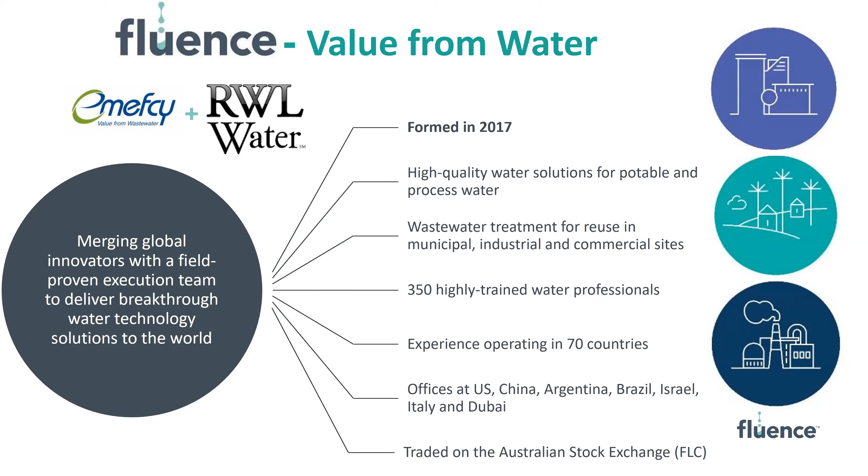Emefcy, which had the proprietary technology of the MABR. We are 350 highly trained water and wastewater professionals spread worldwide. We have experience in over 70 countries, with offices in the US, China, Argentina, and more, which I will show in a minute. We are a publicly traded company, traded on the Australian Stock Exchange under the ticker FLC.

Our global presence, as you can see, spans anywhere from China, Australia, Europe, Israel, Africa, or the Middle East, and of course the Americas — South America, Central America. We're headquartered in White Plains, New York, so essentially an American-based company.

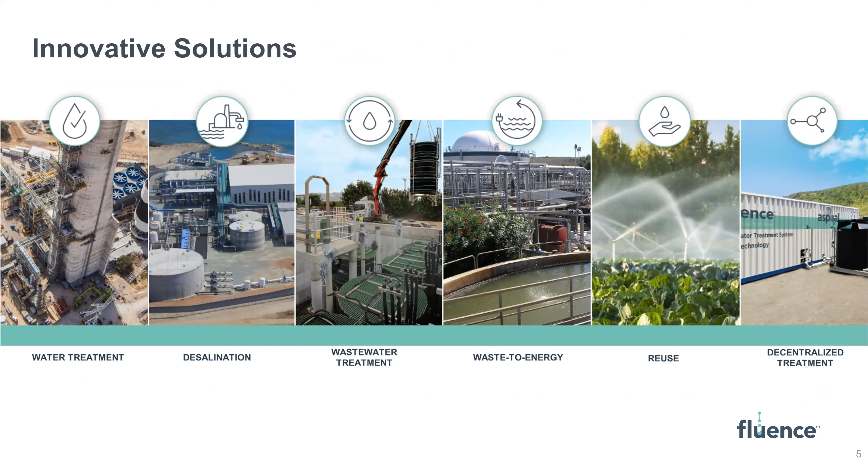We're involved anywhere in the water spectrum, from ultra pure water all the way to ultra black water treatment. So if it has anything to do with water, we've probably dealt with it and had experience with it. And with over 7,000 installations in over 70 countries, we feel quite confident to cater to any type of client, from large to small, where Fluence mainly focuses on the smaller to medium sized applications when it comes to MABR technologies.

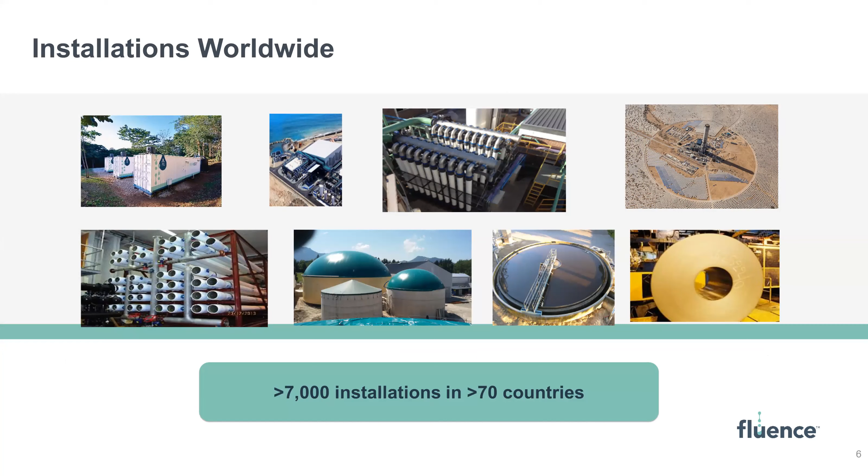So a little bit about the MABR. By the way, I forgot to mention — everyone, we encourage you to use the Q&A button at the top of your screens to ask any questions. Later in the webinar, we'll address those questions. So please feel free to write any question and we'll try to answer all of them as time permits.

As I mentioned, a little bit about the MABR technology. MABR is an acronym for Membrane Aerated Biofilm Reactor. In the water spectrum, we're very innovative when it comes to technologies, but not so much with names. So you have MABR, MBBR, MBR — all sound very similar, but are essentially very different.

MABR is an acronym for Membrane Aerated Biofilm Reactor. Typically, as soon as I say the word membrane, the first thing that comes to people's minds is UF membranes or MBRs. I need to ask you to forget anything you know about MBRs or UF membranes, because the MABR is a membrane, but acts completely differently.

That's why I like to start with this slide, a process flow diagram of a conventional domestic wastewater treatment. You'll always have your biological part of the process, your pre-treatment part of the process where solids are screened out, then some sort of biological process to get rid of soluble pollutants. Then, depending where you are in the world, you may have further filtration by cloth media filters or UF membranes or other technology, and disinfection. And you'll always have your byproduct, which is sludge.

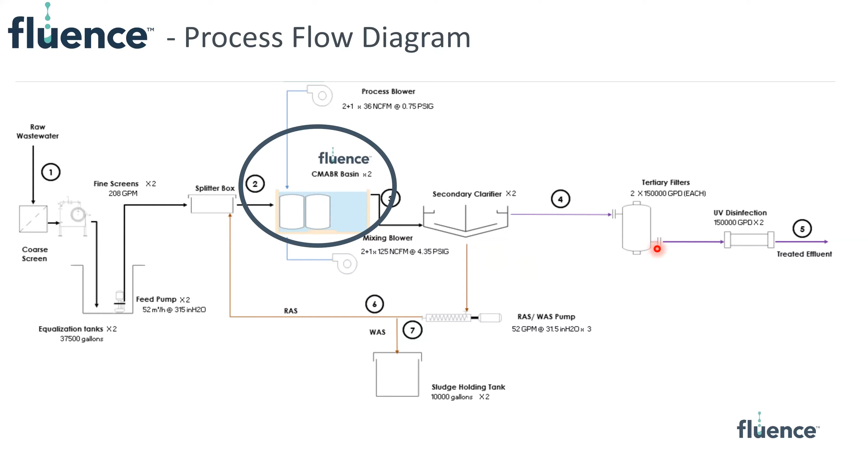With MABR, the process remains exactly the same, but we're going to focus on the biological part of the process. All of the auxiliary equipment around the biological part remains exactly the same and is designed just like in any other process. So from now on, I'm going to mainly focus on the biological part of the process when talking about the MABR — and that's why it's so different from MBR, which comes at the back end of the process, with the UF membranes. So, a little bit about aeration.

Aeration is probably one of the highest energy consumers in the biological process. This is a timeline representing the development of technologies in aeration.

It's a way to introduce air or oxygen to the wastewater. Back in the 50s and all the way up to the 70s, they used surface aerators, which would be installed on the surface of a biological basin, would spin, and any water droplet that came out to the atmospheric air would get whatever oxygen it could, then land back into the basin. A highly inefficient way to introduce oxygen to the wastewater, consuming approximately 3 kilowatt-hours for every kilogram of COD removed.

Then in the 1980s, they said, well, if we can introduce the air from the top, why not introduce it from the bottom of the basin, create a nice jacuzzi for the bugs, and make the process a lot more efficient. They came up with coarse bubble diffusers. This made the process more efficient when it came to energy, consuming approximately 2 kilowatt-hours for every kilogram of COD removed.

Then they said, well, if we can do coarse bubble diffusers, why not do fine bubble diffusers? Make the air bubble more available for the bacteria by increasing the surface area. They came up with fine bubble diffusers, which made the energy consumption more efficient, reducing it to 1.5 kilowatt-hours for every kilogram of COD removed from the wastewater. Please note that comment at the bottom, that this includes nitrification, which also consumes oxygen beyond BOD/COD removal.

So how were we able to make this energy efficient, introducing oxygen to the wastewater so efficiently when it came to energy?

Basically, we came up with this semi-permeable membrane sheet that allows oxygen to diffuse through it, but did not let water flow into it. A matter of surface tension and a coating that we put on top of the membrane to make the energy efficiency a little bit more efficient and more robust. That's the white material you see at the bottom right-hand side of the screen.

So we used that material and created a sleeve out of it, having an approximately 850 feet long sleeve by 3 feet, putting a geotechnical spacer net in between two membrane sheets and welding the circumference. So now we have like a sandwich: a membrane, a spacer, and then another membrane, with the circumference welded. We have one inlet valve at the beginning of the sleeve and an exhaust valve at the opposite side of it.

We would pump atmospheric air into one end of the sleeve at extremely low pressure, less than 0.047 psi, letting the air travel the entire 850-foot-long sleeve until it goes out from the exhaust valve. This is not how we introduce air or oxygen into the wastewater; this is just to maintain fresh air inside the sleeve 100% of the time. For that, we're utilizing the smallest blower available, which operates 100% of the time, continuously pushing air from one side of the sleeve to the opposite side.

So now, basically, from now on when I refer to a spiral, I mean a spiral tower, excuse me, an MABR tower. It means a few of these spirals stacked together.

So now we're pushing air into one end of the sleeve, and all of these spirals are basically full of air. When we put them in a biological basin, we need to anchor them down because it's like putting balloons underneath the water. So we anchor them down into the biological basin. The air we push into the sleeve is atmospheric air, which has approximately 20% oxygen concentration inside of it.

It is submerged in a tank full of wastewater, where bacteria naturally develop and utilize whatever oxygen is available in the biological reactor, reducing the dissolved oxygen content in the basin almost to 0.

That concentration difference, between 20% oxygen concentration in the air pushed into the sleeve and almost 0% dissolved oxygen in the biological basin, is the driving force for oxygen to diffuse from the high concentration side inside the sleeve, through our semi-permeable membrane, to the low concentration side, which is the wastewater. The nice thing about diffusion is that it's a naturally occurring process that consumes no energy. That is how we are able to reduce the energy associated with aeration by over 90%.

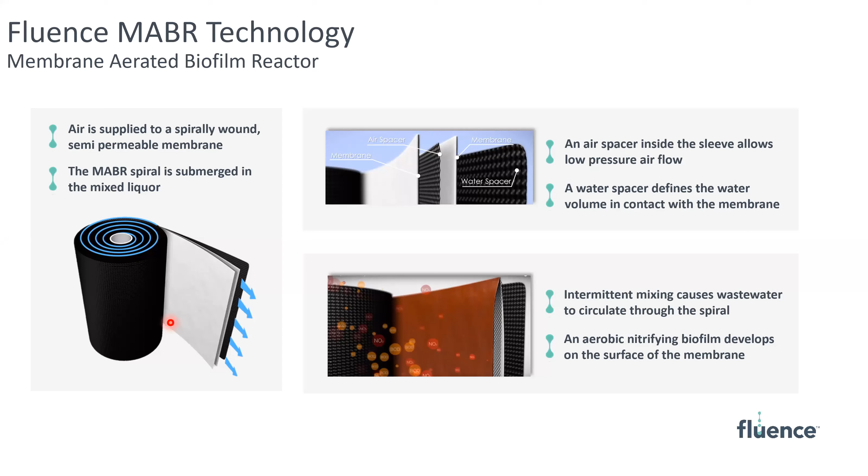When I present this in places where energy is very expensive, this is obviously one of the biggest drivers to adopt the MABR technology. But in the US, energy is not very expensive. It's a nice-to-have feature, and for very big municipal plants it's a big issue and energy reduction is important. But for smaller or decentralized plants, energy is cheap. In the US it would cost typically anywhere between 6 cents to 10 cents per kilowatt hour. So obviously it's a good driver, but it's not a huge driver in small plants across the United States.

But beyond being a very efficient diffuser, the MABR membrane acts as a wonderful platform for biofilm to develop on top of the membrane.

Basically what happens, if we were to take one of our spirals and zoom in, we would go into the sleeve. The dashed line represents our semi-permeable membrane. We all need to imagine there's another semi-permeable membrane on the opposite side, where I'm showing my mouse cursor. Air is being pushed towards your screen, into your screen, and as I explained, only oxygen is being diffused into the wastewater because of the concentration difference. I hope this makes this slide a little clearer.

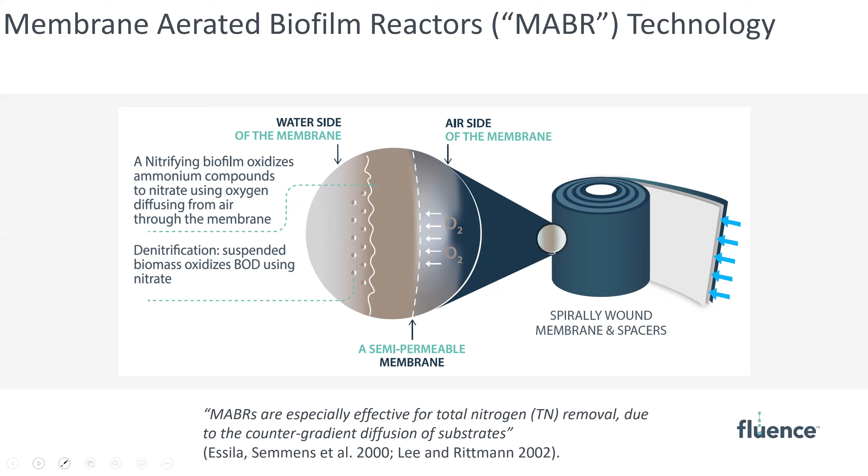I will repeat that slide shortly, because that is probably the most technical part of the presentation. So, real quick...

As you can see, we've switched it around—we're zooming in now. On the left side, air is pushed into the screen. You need to imagine there's another semi-permeable membrane sheet on the left side. Air is being pushed in, and only oxygen is diffused through the semi-permeable membrane into the wastewater. Biofilm develops on top of the membrane.

Ammonia is taken up along with oxygen, and nitrification takes place—nitrate is produced and discharged into the biological basin. With BOD available in the basin, denitrification takes place, and the nitrate is converted to nitrogen gas. So again, this is simultaneous nitrification and denitrification.

Now, all of this takes place naturally. In other words, no matter how enthusiastic the operator is and how much they want to intervene, there's not much they can do.

This is all designed by Fluence, or by an engineer. When we get the influent parameters and characteristics, such as the concentration of TKN, ammonia, and so on, and understand the effluent requirements, we design the system to include enough MABR towers in series to get rid of all the nutrients. You're then probably left with some BOD to polish off, which I'll discuss how that's done. What I'd like you to take from this part of the presentation is that the MABR is an extremely efficient diffuser for introducing oxygen into wastewater, and a champion when it comes to nutrient removal, mainly nitrogen. I'll now address phosphorus a bit.

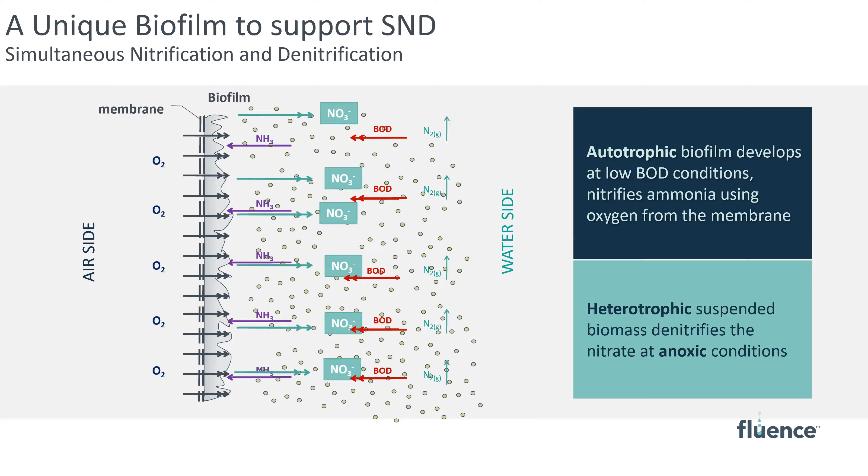We typically install a selector tank ahead of the MABR biological basin in order to allow for some anaerobic conditions for the phosphorus to be released by the bacteria and for the BOD being taken in by the bacteria, which I will demonstrate in the next few slides.

So the wastewater that flows into the MABR-based basin comes from a selector tank with about 15 minutes retention time. It'll go through 3-stage MABR towers in this example to get rid of all of the nitrogen, and it will follow these empty tanks, which will be accommodated by your typical fine bubble diffusers for some BOD polishing, because we have not addressed BOD yet.

The first pollutant that is eliminated in the wastewater is nitrogen, and only then is BOD removed. For the denitrification process, we need a carbon source. Unlike conventional processes where BOD is removed first and then nitrogen, and many times they don't have sufficient carbon source to support denitrification, in this case that never happens because we're not addressing BOD first. Whatever BOD is available in the wastewater is utilized as a carbon source for denitrification, and only whatever is left after that needs to be polished off with fine bubble diffusers.

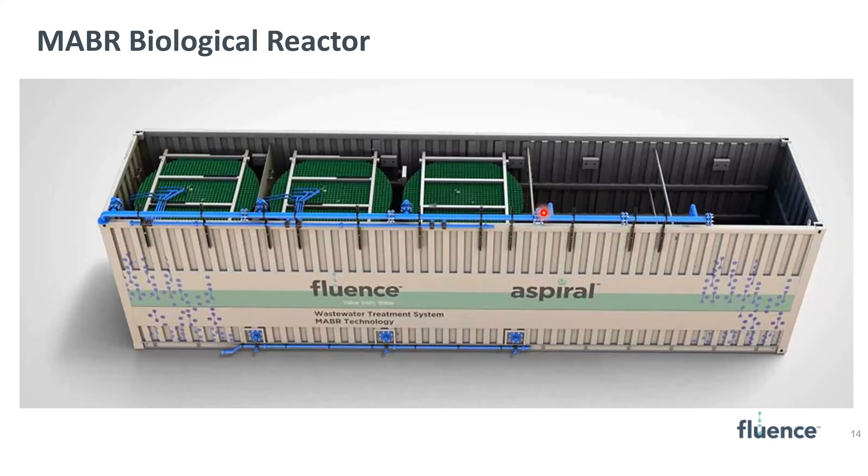This is for techno-economical reasons, because it's cheaper to put a fine bubble diffuser to remove BOD as opposed to an MABR module. So that is how we ended up designing an MABR-based process where nutrients are removed by the MABR modules, and whatever BOD you need to polish off, you do that with fine bubble diffusers.

So here are some results that better explain how we are able to remove nutrients from the wastewater. I'm using the same example I just showed. Wastewater flows from left to right.

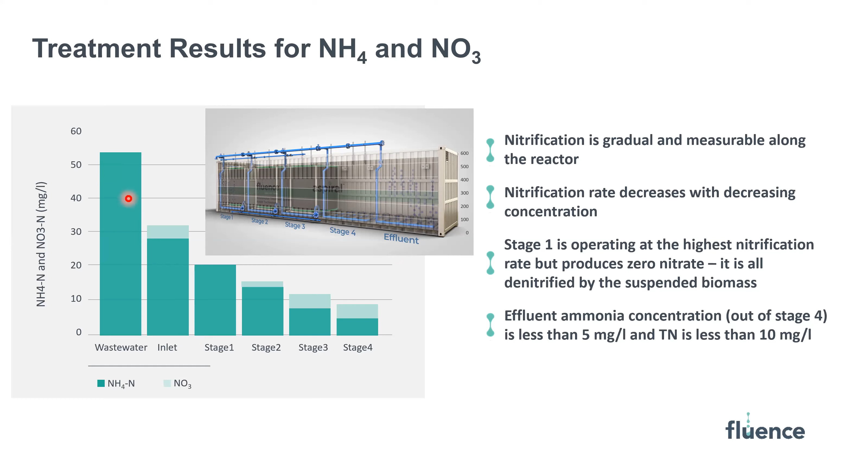Another thing we've seen: as I explained, typically you'd have a selector tank to allow biosorption to take place. You'll have a high COD content coming in the raw wastewater, and then under the anaerobic conditions in the selector tank, the bugs will take in whatever COD or BOD they could and release phosphorus. Here you can see this is before the selector tank, stage 1 is after the selector tank, and then you can see the slow reduction in COD. By the way, the reduction in COD in stages 2, 3, and 4 is associated with the denitrification, with the carbon source being utilized for denitrification.

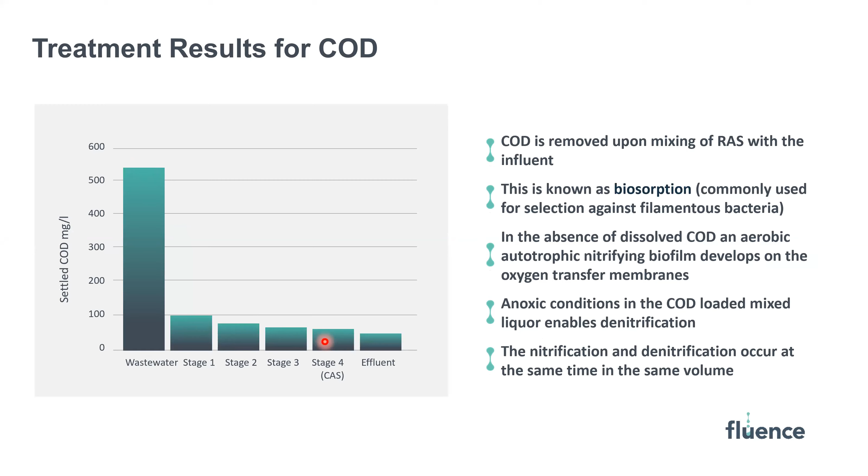And that's what happened to the phosphorus, which is the opposite of BOD or COD. You come in at about 7, and just like the bugs take in all the BOD, they release whatever phosphorus content they have in their bodies. So you have a total phosphorus spike at the beginning of the process. But the interesting thing is that the conditions around the MABR towers are sufficient to allow for a bio-phosphorus removal process to take place. At the bottom, you can see our ORP levels around the MABR modules—they get very negative, on the verge of anaerobic, which allows the PAOs to thrive in those conditions.

So you're basically getting both nitrogen and phosphorus removal biologically. What we see is between 80 to 90% bio-phosphorus removal from the process alone. So say you come in at 10 total phosphorus, you can expect to come out between 1 and 2 milligrams per liter. And if you need to polish that further, you can add some chemicals. But the point is that the process supports biological phosphorus removal as well.

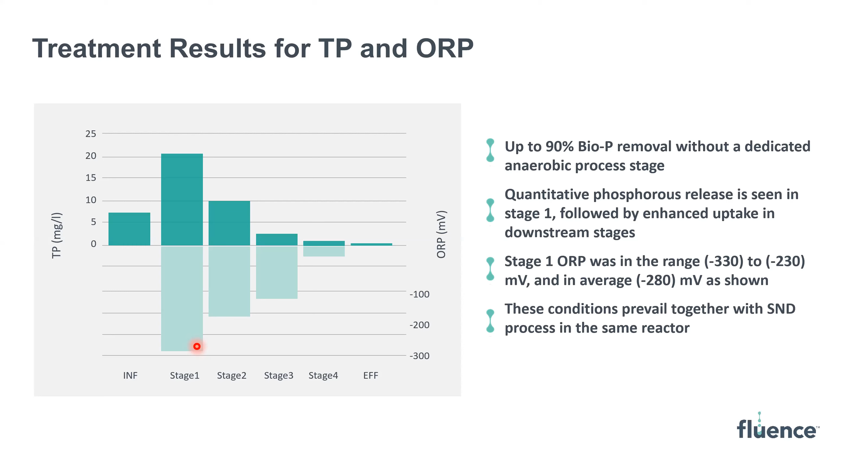And as a general note, the entire process is being controlled by the ORP levels. So once they change, the controls know how to recognize that and switch the diffusers on and off, which I will talk about in a second.

So some MABR configurations. Until now, I've presented everyone the technology, but what Fluence had done is to take this technology and convert it into products. In the center, you can see the MABR tower, which is the technology, and then we've created a few different products around it.

The main product I'll talk to you about today is our Aspiral package plant, or Aspiral product line. Basically, we've taken the MABR tower and inserted it into tanks that we manufacture, creating a whole package plant from A to Z.

Anywhere from the raw wastewater coming in, it needs to be fine screened. I saw there was a question about what screening is required. We're going through the same evolution as MBRs did in the 90s or early 2000s, where we started with 1 millimeter perforated fine screen ahead of the MABR basin. Today, we're allowing 1.5 millimeter perforated screening ahead of it, and I believe gradually over time we'll get more lenient about that requirement, but currently we're at 1.5 millimeter perforated screening ahead of it.

So it will go, the Aspiral box comprises the whole package plant, meaning the fine screening. It'll go into the biological reactor, then through a secondary clarification step or a UF membrane, which I'll discuss in a bit, and then through either a media filter and disinfection and so on. So this is your complete package plant.

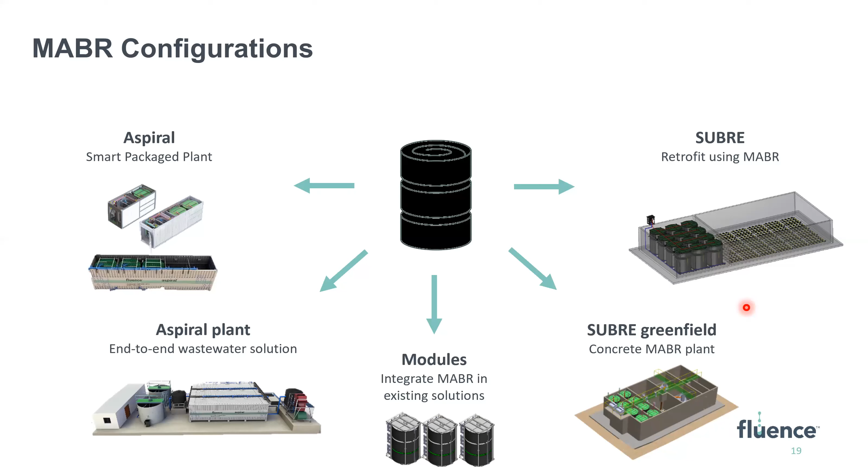So a little bit about the Aspiral product family. What we've done is basically create different Lego pieces, if you would, that when put together, give you the complete package plant. So we have different models: the Aspiral S1, S stands for small, 1 stands for how many MABR towers are in the reactor; an Aspiral M2, medium, with 2 MABR modules in the reactor; and then the Aspiral L for large, with anywhere between 1 to 5 MABR towers installed in the reactor.

Again, how many MABR towers are installed is a function of the nutrient concentrations coming in and the nutrient effluent requirement coming out.

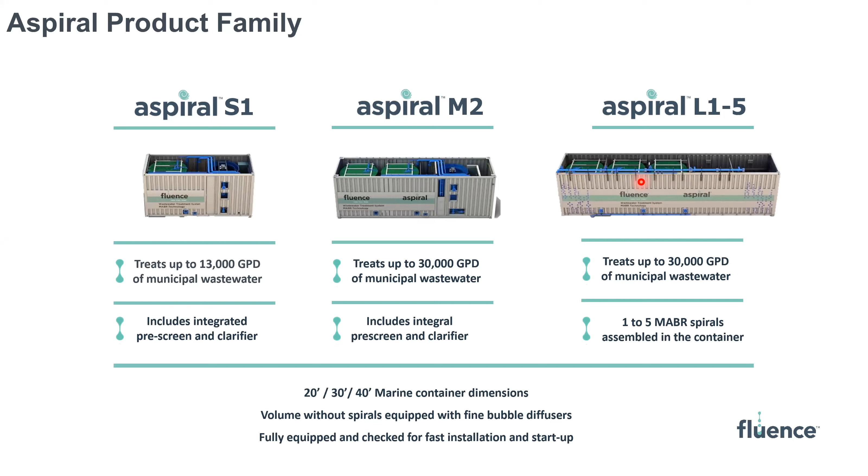Once you put these Lego pieces together, these are complete plug and play solutions. By the way, these look like cargo containers, but it's very important to mention these are not cargo containers. What Fluence is doing is manufacturing water tanks in the same dimensions as cargo containers, and then we certify these water tanks as cargo containers, which reduces our shipping cost significantly. So that's why they look like cargo containers, but these are water tanks manufactured from scratch. This is an extremely important feature to explain.

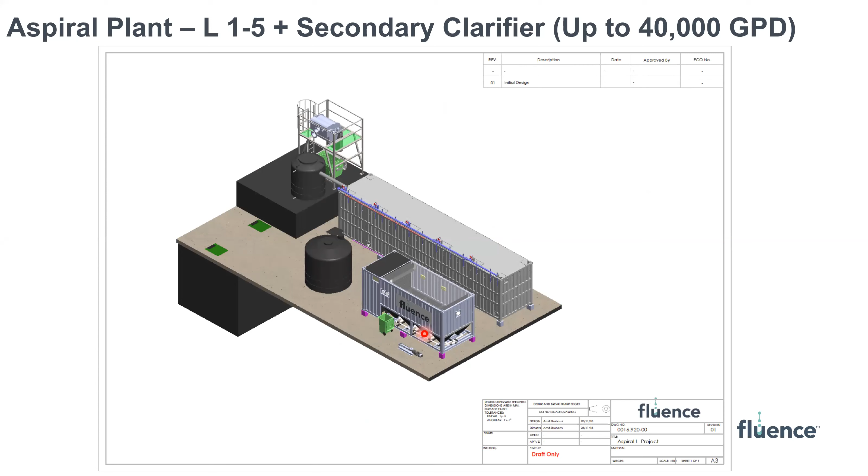In this example, what you can see is an Aspiral L box coupled with a secondary clarifier. This teaches you that the MLSS concentration in the biological reactor will be around 4,000 milligrams per liter of MLSS, plus or minus 250. But here's an interesting example where we couple our Aspiral L box with a UF membrane—so MBR plus MABR—and we'll be operating at around 10,000 milligrams per liter of MLSS at that point. So what you can understand is that the MABR towers don't really care about the concentration of mixed liquor around them; it can go anywhere from 4,000 to 10,000.

It's all a function of the drivers of the opportunity or the application. If footprint is an issue, we will probably go with MBR at the back end of the MABR. If there are extreme effluent requirements, we'll go with MBR. But if simple operation is required, we'll probably go with an Aspiral box followed by a secondary clarifier, followed by a sand filter, if you would, and disinfection. Obviously, Fluence provides all the configuration or all the solution.

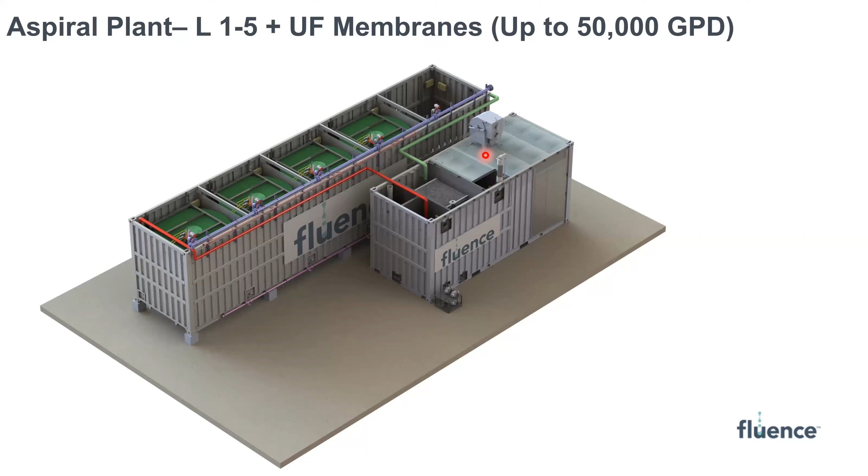So we can play with what configuration it goes. But I like to use this slide to explain that the MABR does not compete with MBR, it complements MBR. It's a feature, a component that goes into the biological process in order to enhance its capacity.

Obviously, we can expand these over time. We can phase it in. So what you see here is an Aspiral site, if you would, where you would have multiple Aspiral Ls, followed by a UF membrane and auxiliary tankage that is required. This is an extremely important feature, especially for smaller applications, because you want to invest as little as possible at the beginning, and then invest more only if more sewage flow comes into the plant. That allows you to spread your expenses, or your client's expenses, over time. So it's a complete modular solution that can be expanded over time, which is an extremely important feature.

One of the things that Aspiral does is minimize the amount of civil works required. In the United States, civil works are probably the most expensive part of any project. With an Aspiral setup, the equipment costs about 50% of the whole project cost, and the civil work supporting that costs an additional 50%. That's what we see, as opposed to a conventional municipal project where equipment is typically between 15 and 20%, and the rest is associated with engineering and civil works. So by having a plug-and-play solution, we're able to reduce the amount of civil works required, and by that, reduce the cost of a project as a turnkey.

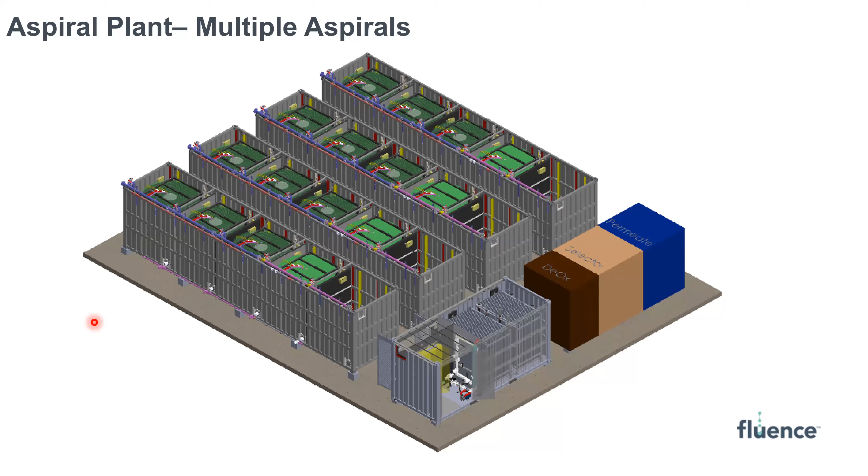Again, this is just another layout of the Aspiral site. I don't want to get into this. This is an example for a SUBRE tower. As you can see, it's a function of how deep the basin is that we want to retrofit our modules into. So it can be a 1-stack tower, 2-stack tower, 3-stack tower, 4-stack tower, and so on.

It's important to explain that at this stage, these are not drop-in, meaning that in order to retrofit an existing municipal plant, we would need to drain the basin, install the MABR reactors or towers, and fill the basin again. So we are working on a drop-in configuration, but at this stage, that's what is required.

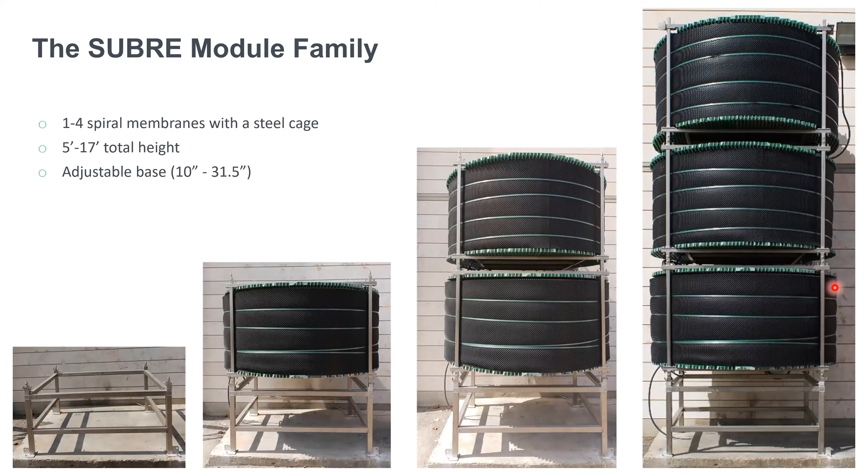This is an example of a retrofit, but Leon will talk more about that, so I'm not going to take the time to discuss this. But essentially, we can retrofit into existing facilities. As I explained, the main drivers to do that are to get better effluent quality from existing facilities, especially when it comes to nutrients, to be able to increase the flow within a given infrastructure, and to reduce the energy use of the plant.

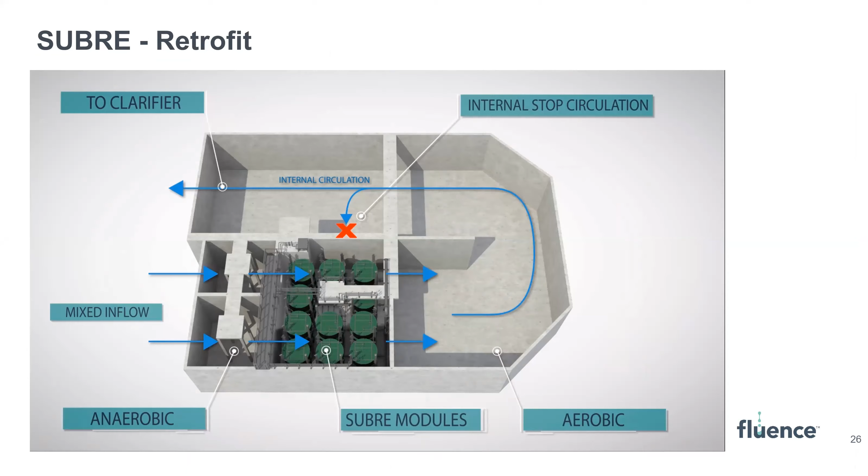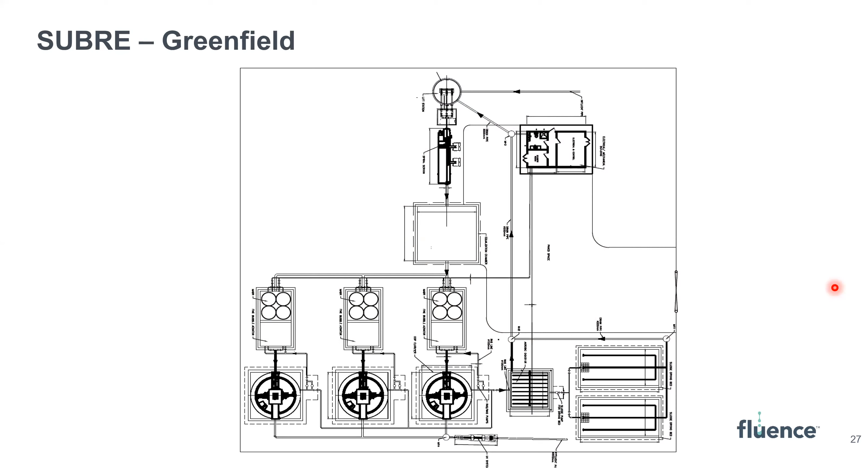Again, these are some examples. This is a project taking place in Jamaica for SUBRE Greenfield, where they're putting in 3 lines. That's the technology that was chosen.

Now for the remaining 5 minutes that I have, I'd like to take your time and go over a couple of case studies that are very interesting before I hand it over to Leon. I apologize, I've taken a little longer than I promised, Leon.

The first case study is a pilot that we put in at Stanford University in California. The facility is called the Codiga Resource Recovery Center, which is basically an initiative Stanford came up with to test and validate new wastewater treatment technologies. We were their first client. The system was put in at Stanford in the beginning of 2018. Again, it's just a pilot, so it treated only 3,000 gallons per day of extremely highly concentrated wastewater. Please note the raw wastewater characteristics: over 1,200 milligrams per liter of COD coming in, over 100 milligrams per liter of TN coming in.

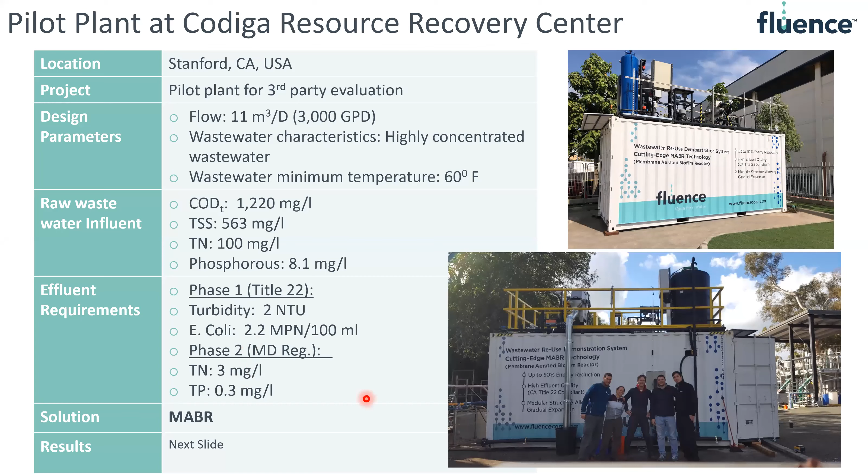We had 2 phases for the pilot, or 2 goals, I should say. One was to meet California Title 22, which mainly addresses tertiary treatment and disinfection—turbidity of less than 2 NTU and E. coli count of less than 2.2 MPN per 100 milliliters. Then we had a phase 2, or second goal, to meet Maryland's ENR requirements, enhanced nutrient removal requirements, which essentially means less than 3 milligrams per liter of total nitrogen and less than 0.3 milligrams per liter of total phosphorus.

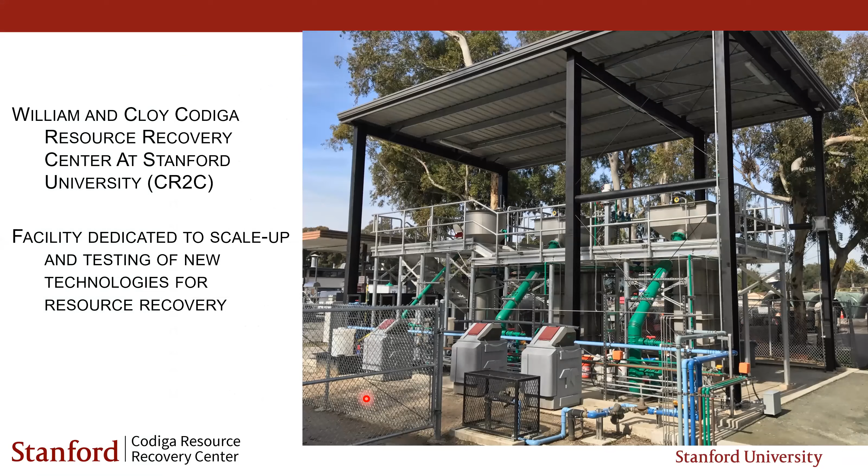So this is the facility, the Codiga Resource Recovery Center. As you can see, the slide theme has changed because these are slides generated by Stanford University.

So this is the setup. You would have the raw sewage coming from the main sewer line in the vicinity of the site. It would go through grit removal, and then you could choose what type of wastewater you would want.

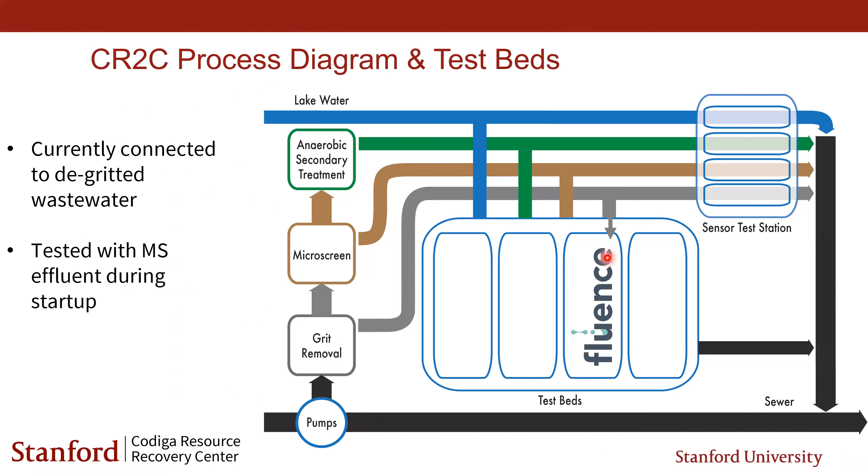In our case, we chose the raw wastewater straight after it came from the municipal line. So it would go into the Fluence pilot plant.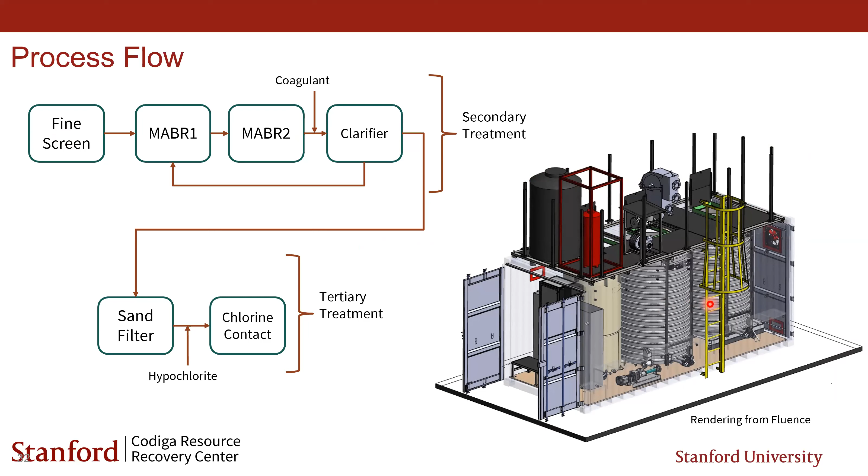This is a custom designed pilot for Stanford, so they would be able to walk into the container and test the wastewater at all the different stages of the process.

So in this case, it went through 2 MABR stages, followed by a secondary clarifier, followed by a sand filter that was put on the roof, a chlorine contact tank for chlorination, and discharge effluent.

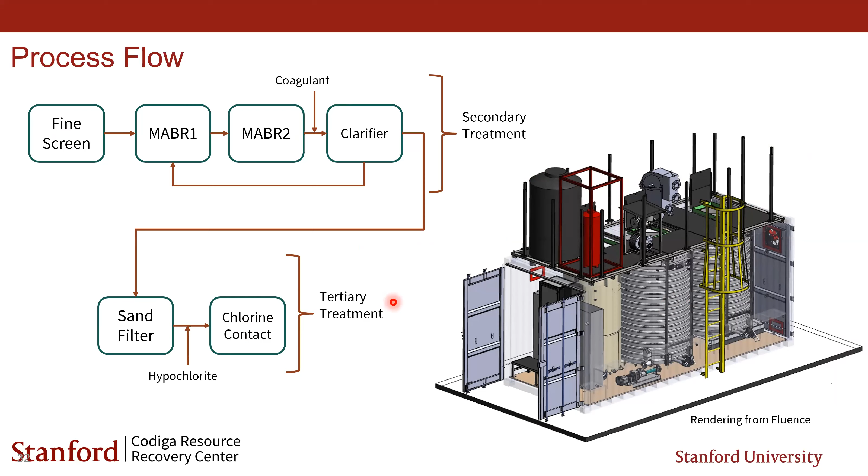The goals, as I explained, were to meet California's Title 22 reuse standards, so NTU and disinfection.

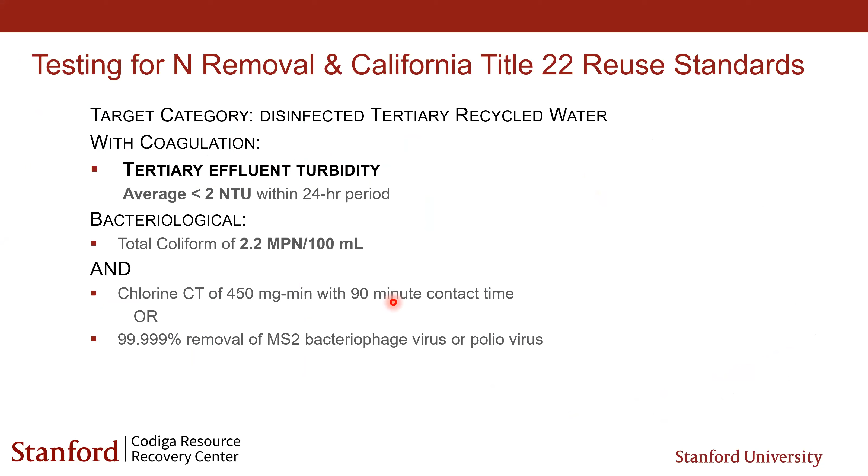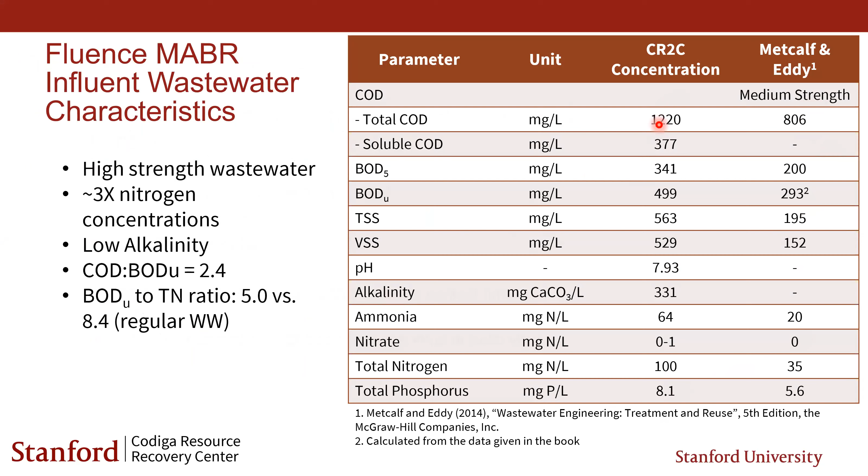We also added the TN requirements for Title 22 because Title 22 only talked about disinfection and tertiary filtration. So we added the requirement of meeting less than 10 total nitrogen.

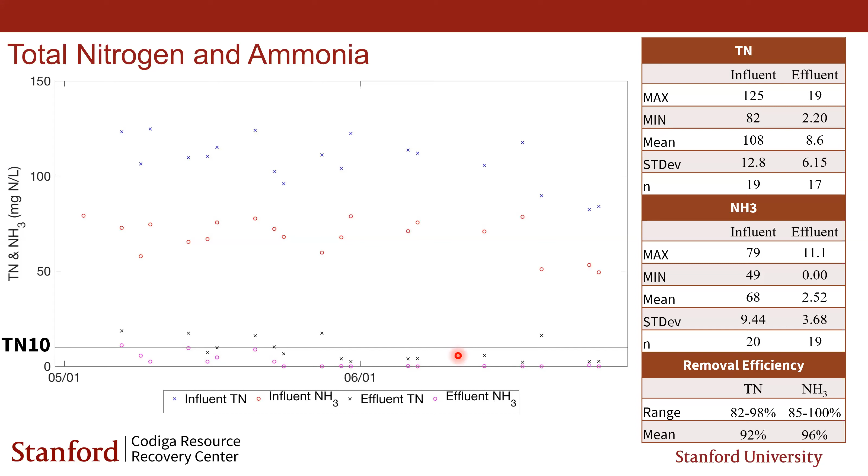Turbidity was always kept below 2 NTU. So we were successful in this.

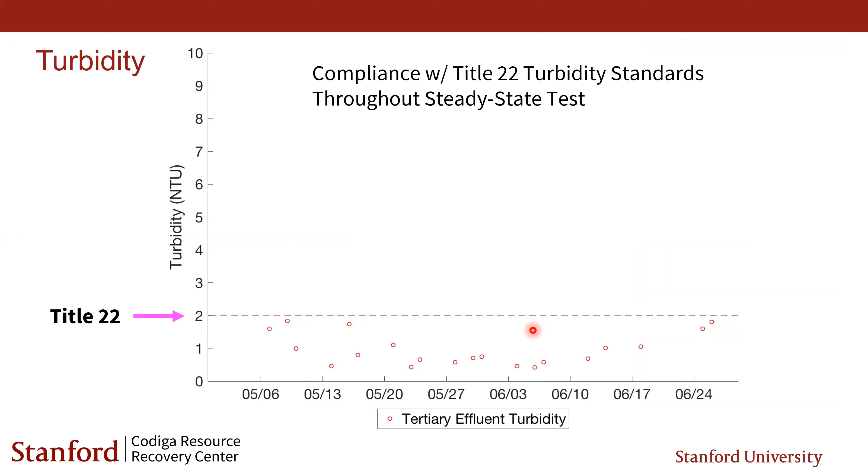In a second I will show you also the residual chlorine, which represents the disinfection capability we had, but I wanted to give some acknowledgement to the people at Stanford that supported our efforts.

Professor Craig Criddle, who basically manages the Codiga Resource Recovery Center, and Dr. Sebastien Tilmans, who manages the facility.

So these are again the turbidity and total residual chlorine results, which basically mean that we met the 2.2 MPN per 100 milliliters of total coliforms.

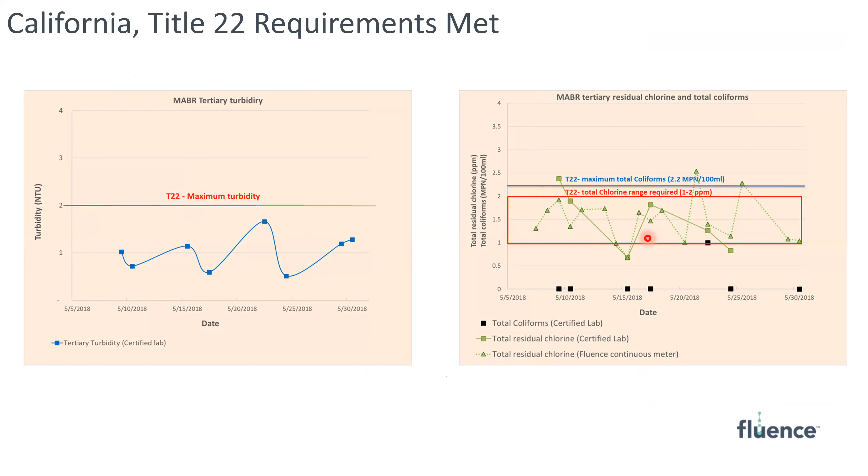And then we went on to the second stage, which needed to demonstrate that we're able to show always less than 0.3 milligrams per liter of total phosphorus in order to comply with Maryland's enhanced nutrient removal requirements.

And also total nitrogen of less than 3. Please note the concentration difference - this is bringing it from 111.5 milligrams per liter total nitrogen down to below 3.

So obviously successful in this, and we were very happy. That's part of the reason why MDE gave their blessing to our process to be implemented in the state of Maryland.

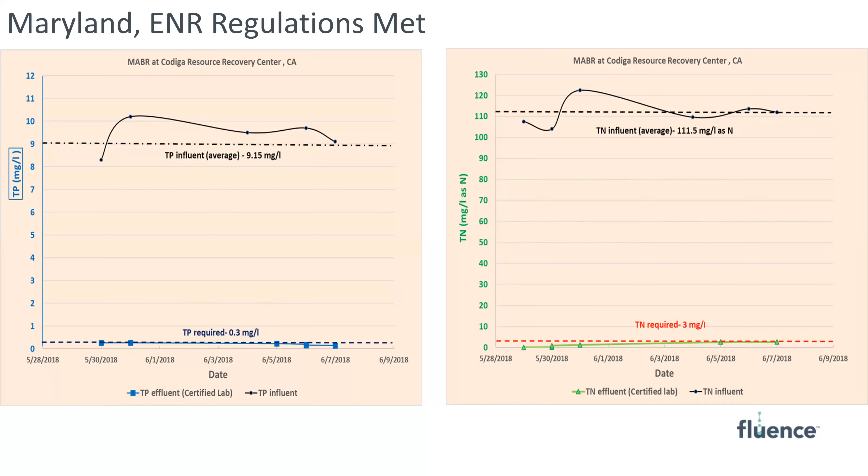Another last case study, and from there I'll hand it over to Leon. It's an RV resort in the state of Oregon, in La Pine, Oregon.

This project has been done in collaboration with Orenco, who is probably one of the biggest fiberglass manufacturers in the United States, and they also have a division that does their own packaged wastewater treatment plants.

In this application, we needed to treat the wastewater of an RV resort in Oregon with an approximate 18,000 gallons per day average daily flow with a peak of 42,000 gallons per day.

We ended up putting 4 MABR towers of 2 stacked spirals in each tower, integrated into Orenco's fiberglass tanks, which required only 1 tank.

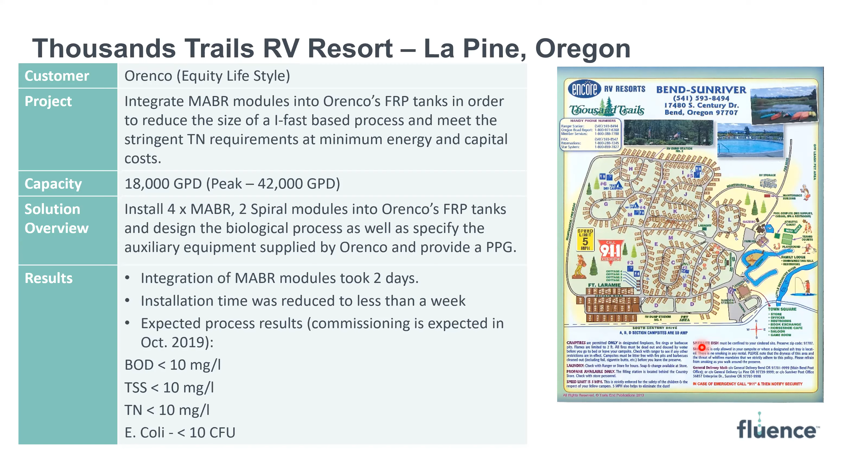Effluent requirements were less than 10 BOD, less than 10 TSS, less than 10 total nitrogen, and you can see the disinfection requirement.

Before Orenco chose us as the biological treatment technology, they evaluated 5 different other technologies.

So anyway, obviously the MABR, MBBR, simultaneous nitrification and denitrification activated sludge process, 2 different types of MBR processes, traditional activated sludge process, and Orenco's own textile packed bed filter.

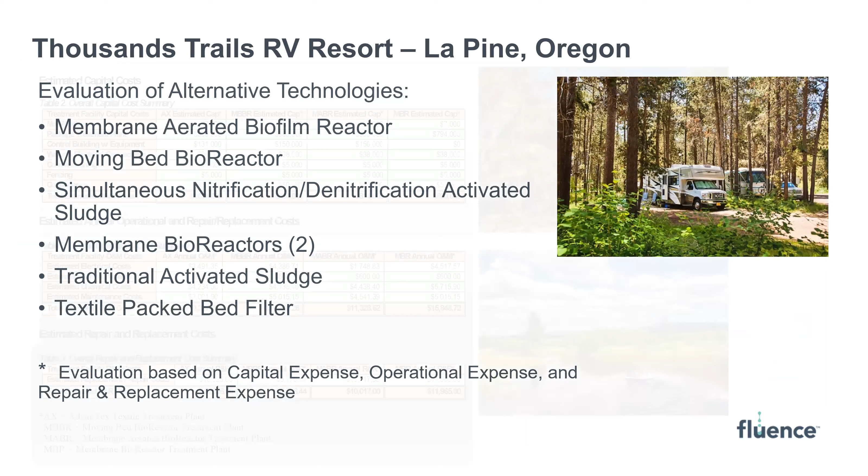So they evaluated all of these different technologies, and they've done a complete life cycle cost analysis, both on the capital cost and the operation cost summary.

So basically trying to put these together, what you can see here is that essentially the MABR, which is the 3rd column, came out cheaper both on the capital side and obviously on the operational side.

So when you combine these 2 together, you see that the MABR was the superior technology.

I did forget to mention that for Stanford, the full report is published and available for everyone at the Stanford website. But if anybody would like a copy of the report done by Stanford, please don't hesitate to reach out to us and we'll send it through.

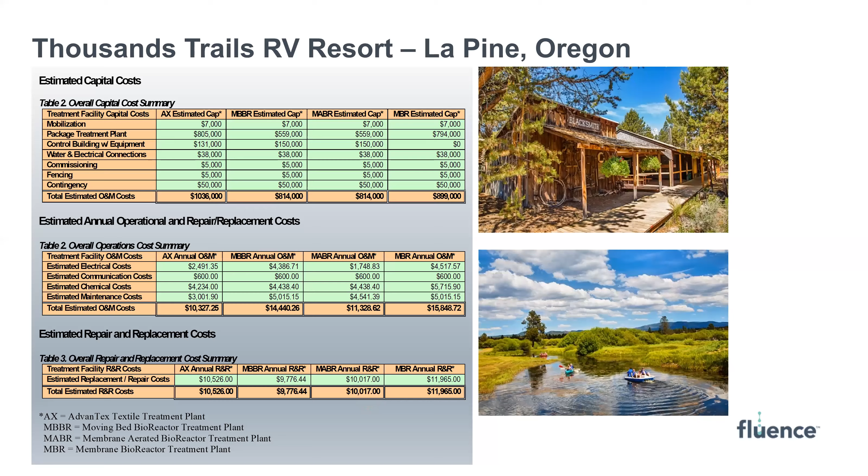And at this point, I'd like to pass the stage to Dr. Leon Downing out of Black & Veatch, who is a principal process engineer and innovation leader with Black & Veatch from Madison, Wisconsin. Leon provides technology leadership in support of Black & Veatch process engineering and applied research projects globally. A graduate of the University of Wisconsin, Platteville, Leon obtained his Master of Science and PhD at the University of Notre Dame. Dr. Downing is an active member of several professional organizations. He currently serves as the Vice Chair of the Modeling Expert Group of the Americas, has authored chapters in 4 WEF books, and contributed to 14 peer-reviewed scientific journal publications. So thank you, everybody. Leon, thank you so much for joining us and speaking in this webinar.

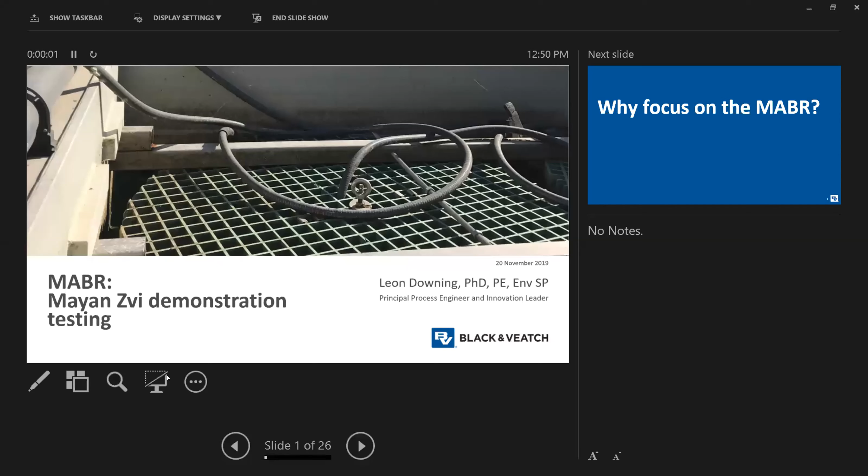Thank you, Ronen. Thanks everyone for attending this webinar today. Let me get this presentation up and running. Nope, let's see, there we go. Ronen, is that showing up? Yes it is. Perfect, thank you.

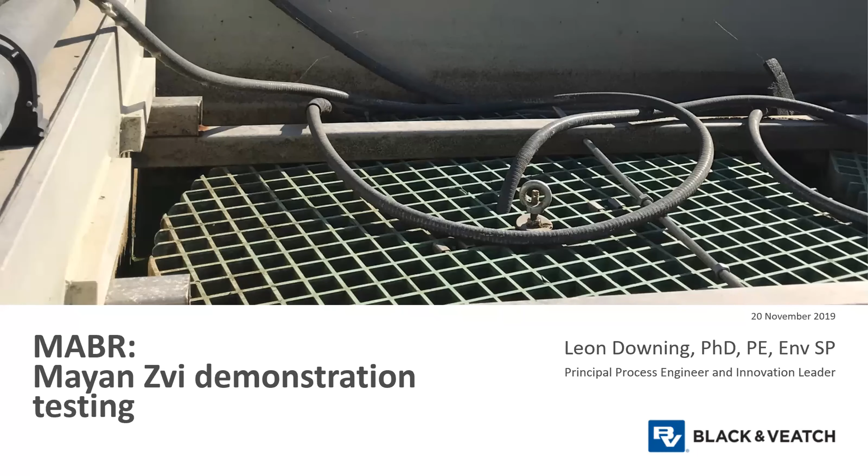Great, so I'll try to keep us on track. I know we have about 10 minutes left, so I'll be going over a few items pretty quickly. But first, Ronen spent a lot of time on this: why focus on the MABR? As an engineering consultant, what's interesting about it to me?

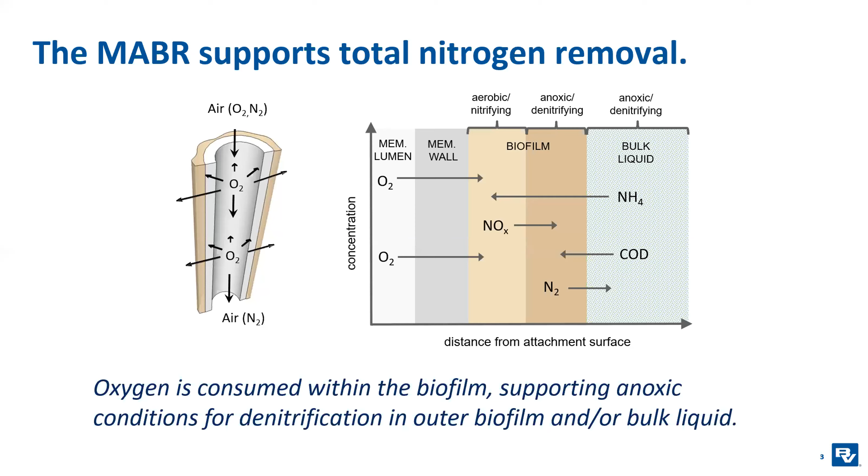So these two parts are essentially what Ronen talked about before, but what's interesting is just how we apply the MABR. When we look at the two different ways we can apply an MABR, there's a biofilm-focused MABR where we're trying to grow nitrifiers and heterotrophs in the same biofilm. We add oxygen at the base of the biofilm, getting nitrification at the base with our nitrifiers, and denitrification at the exterior of the biofilm with our heterotrophs.

And then if we look at the hybrid MABR, the challenge of a pure MABR, like a pure biofilm application, is that if you have a lot of BOD in the bulk liquid, or even if your organisms are processing that BOD—maybe you can't measure the soluble BOD, but there's a lot of activity associated with BOD oxidation—you can get a very thick biofilm. Some of the first applications of this ended up with several millimeters of biofilm on the membrane surface, and as that biofilm gets thicker and thicker, it's more and more difficult for the ammonium to penetrate into the depths of the biofilm.

So biofilm management is always important in a fixed film system. It becomes really critical in an MABR because if you get too thick a biofilm, the oxygen will still be consumed at the base, and you won't really get a high nitrification rate. So there's always this balance of loading conditions and bulk liquid conditions versus the nitrification rate you get. The higher the nitrification rate—meaning the ammonium removed per surface area—the less membrane surface area you need, and that makes the project more economically viable.

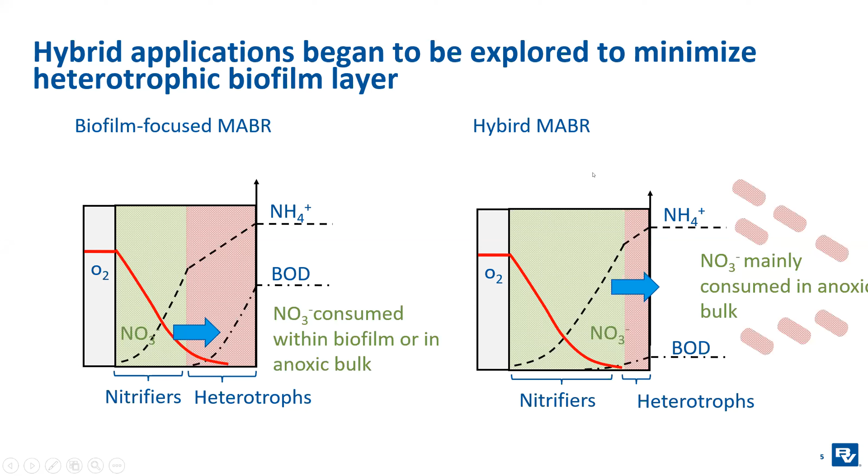So the value proposition that we see for an MABR technology, part of it is the reduced capital cost. If we can do total nitrogen removal in a single tank, we don't need multiple zones. We can do different mixing strategies, potentially need fewer selector zones to do even phosphorus removal, and have the ability to retrofit into existing aeration tanks. It's this idea of process intensification, where we could put a lot more biomass on the MABR and have a higher rate system. So that's part of the CapEx component.

The OpEx component - you get really efficient oxygen transfer rates. One of the big things, this is a CapEx benefit as well, is that if you're doing total nitrogen removal in a single tank, it can limit the need for an internal mixed liquor recycle. A lot of nitrogen removal facilities will have extra pumping at 2 to 4 times the influent flow rate to bring nitrate back to the head of the basin. This eliminates that need, or at least reduces the amount of pumping required. And of course, if we can do simultaneous nutrient removal, it helps reduce the supplemental organic material that has to be added into the MABR system.

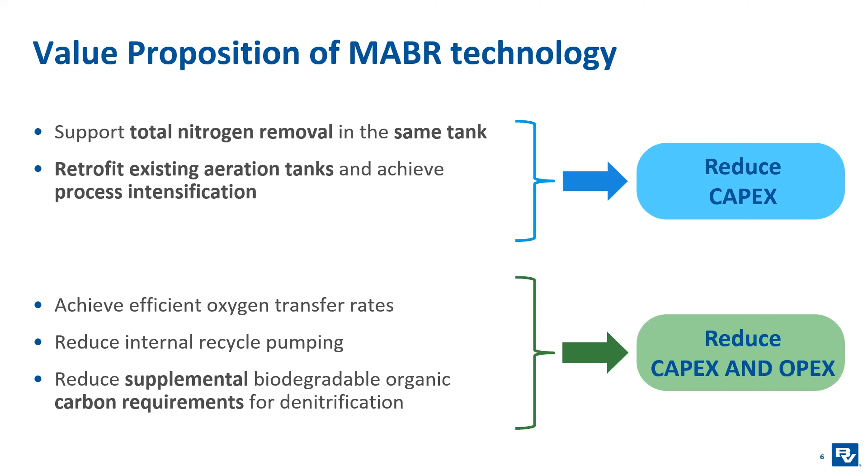So I'll spend a few minutes talking about the demonstration testing at the facility, and it's really looking at addressing some of the key questions around retrofit of the MABR. So if we've got an existing activated sludge tank, or we're looking at a larger type facility, how does MABR fit into that activated sludge process?

Black & Veatch is involved in this process really from an applied research angle, where we're helping to validate some of the testing that Fluence is doing, and also providing direction on the experimental plan - testing that should be done to help address some of the key questions we see for application of the MABR in these retrofit type applications.

It's really interesting to see Fluence's demonstration facilities at this MABR wastewater facility. It's a full-scale wastewater treatment plant. They've done a lot of demonstration testing around the spiral units for nearly a decade, and the SUBRE installation is kind of the culmination of that.

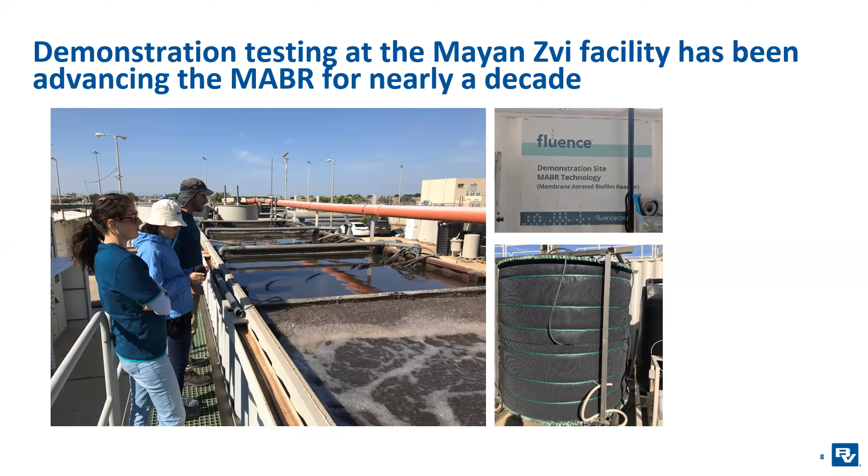And so, Leon, just to interject - you don't need to finish in 5 minutes. You can go a little longer. That's okay, we don't have a limit on that. So feel free to take another 5 or 10 minutes. Okay, well, I'll try to still be efficient to respect everyone's calendar, but yeah, thank you for that, Ronen.

So when we looked at the MABR and the Subre application, the hybrid application, we looked at it from the angle of what are the critical knowledge gaps for the MABR retrofit into the activated sludge process. There's some fundamental questions that we'd be interested in from a research standpoint. I'll get my pointer up here.

So the fundamental questions around community structure - ammonium oxidizing bacteria, nitrite oxidizing bacteria, competition, quorum sensing. There's some really interesting aspects of these counter-diffusional biofilms, where you've got oxygen coming from the base and the other substrate coming from the liquid. That provides some really interesting research questions, and that is still a gap.

There's a lot of activity going on there, but a lot of the focus for the facility was around operational challenges. So, what's the impact of variable influent C to N ratios? How resilient is it to large swings in influent flow rate? How robust is the process to changes in COD concentration? Biofilm management - as I said, it's very critical to have the right biofilm thickness to limit heterotrophic competition for oxygen with the nitrifier. So how do we effectively manage that biofilm?

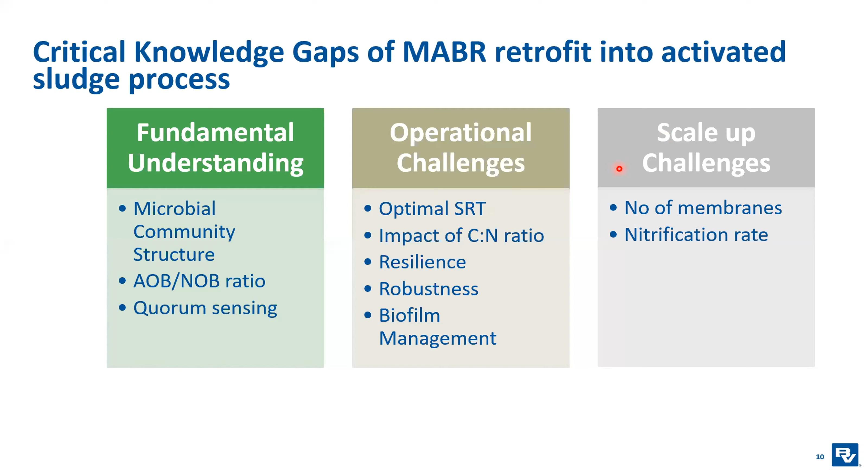So as Ronen said, Subre is really this sort of retrofit application of the MABR in an activated sludge facility. This is the Mayan Zvi facility outside of Haifa in Israel. And so there's actually two parallel aeration basins. This is one of the aeration basins, and this is the second. In November, when I took this picture, one of the aeration basins had been retrofitted with MABR. So it was really interesting because you had parallel facilities, right? You could really get a sense of energy, performance, and some of the operational complexities of running the MABR.

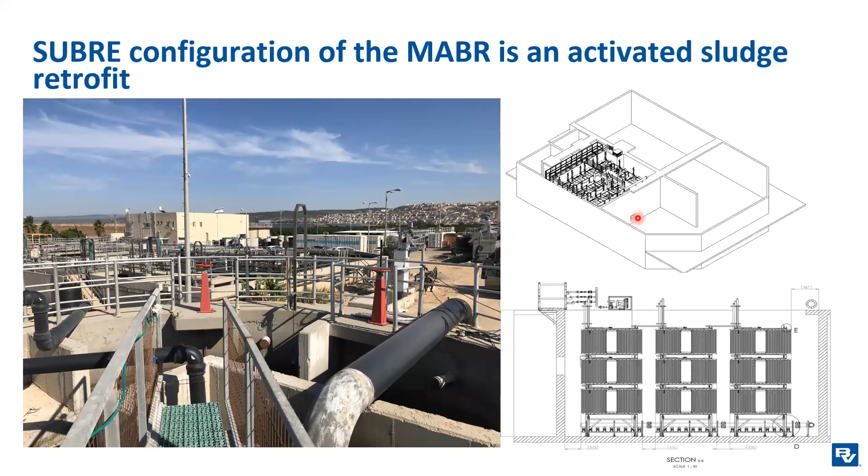When we look at the overall aeration basin, this is a kind of two-pass aeration basin. There was an anaerobic selector zone, so that anaerobic condition tries to absorb some of that initial soluble BOD. The MABR towers were placed inside of the anoxic zone, and then you had aerobic conditions around the back end, and you can see how that stack that Ronen talked about before is placed into the facility. So when we worked with Fluence, the idea was, well, what are some of the key questions we have to address to actually apply the MABR technology into an activated sludge system like this?

So question one that we looked at was, well, what nitrification rate can be achieved in the hybrid MABR? This is, from a design engineer standpoint, the really critical part of it, because the higher the nitrification rate, the less membrane surface area you need, and the lower the capital costs.

There's been a lot of testing around average day conditions, looking at online instrumentation to look at the hourly flow rate versus the effluent ammonium concentration from the Subre reactor, trying to get a sense of how a higher loading impacts higher effluent from the Subre reactor. Again, this is not the final effluent, this is just out of that anoxic zone, and we're trying to balance how much ammonium we really remove in Subre and the MABR versus in the suspended growth. Because one of the challenges with pure MABR application is that as you drive the ammonium concentration lower and lower, the nitrification rate goes down as well, because it's harder to diffuse that ammonium into the biofilm.

So what we've been seeing at the Mayan Zvi facility, and this is pretty similar with the other MABR technology providers as well, is that if you target 30 to 50% of your ammonium removal in the MABR zone in your hybrid application, that's really kind of the best spot for a capital cost benefit. Again, that's in a hybrid application where you're retrofitting the MABR into an activated sludge tank.

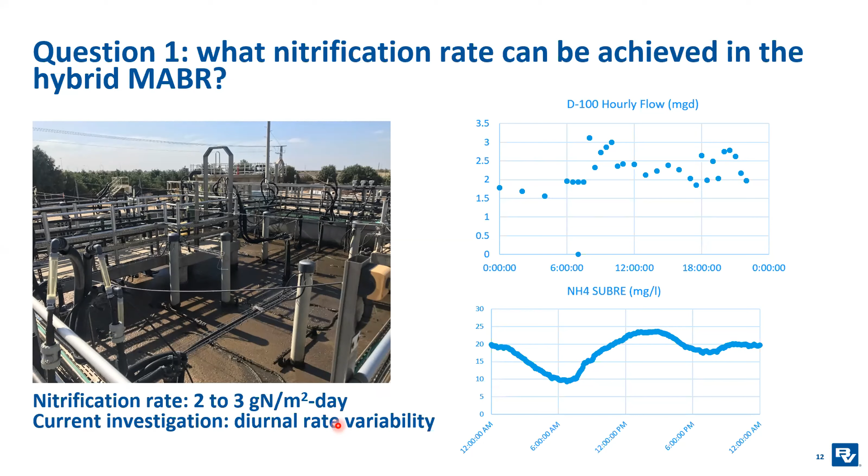The interesting thing is that we talk about the ammonium removal, so this is removing 30 to 50% of the influent ammonium. The nitrate is always below detection. So we're getting full denitrification all the time, and it's really just the nitrification rate that varies over the course of the day. There's a lot of work being done right now to really understand the diurnal variability of this nitrification rate and to try to stabilize that. So this one question has been answered with a lot of really good full-scale data to get a sense of what nitrification rate we can really bank on from a design perspective.

Question 2 is just what's the oxygen transfer rate of the membranes? It's great if we can get this nitrification rate, but how much oxygen are we actually having to add into the membranes, which then helps us to understand the airflow rate. So again, a lot of online testing at this full-scale facility looking at a lot of the different MABR modules and also different depths in the tower.

And what we see is that we're transferring somewhere between 10 to 14 grams of oxygen per meter squared day. This correlates to that nitrification rate, and this is just with compressed air. There are very small blowers right on the deck here that are operating, pushing that airflow rate into the membranes to get this relatively high oxygen transfer rate into the MABR itself. So we're starting to develop really good design numbers around this oxygen transfer rate for the MABRs, which helps establish our airflow rates.

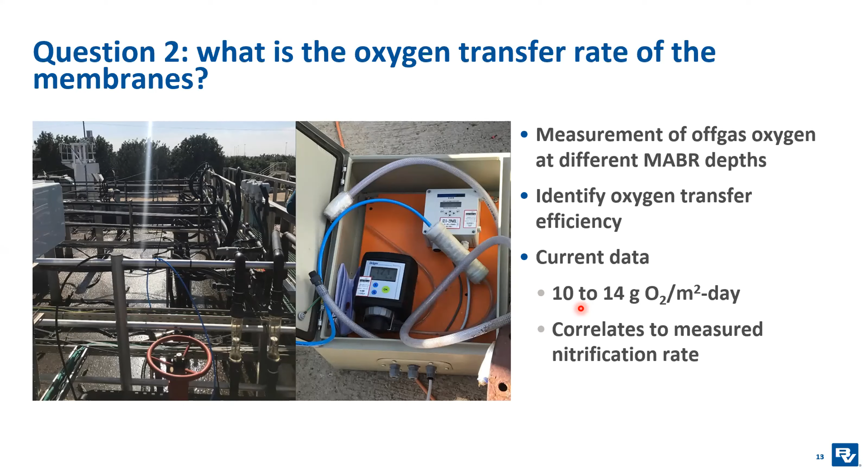Question 3: how should the MABR be mixed? This is a big question as well. If we're mixing the MABR, do you put mechanical mixers in? Do you deal with it with coarse bubble mixers? How does that integrate into the overall system? Hopefully I can get this little video to play.

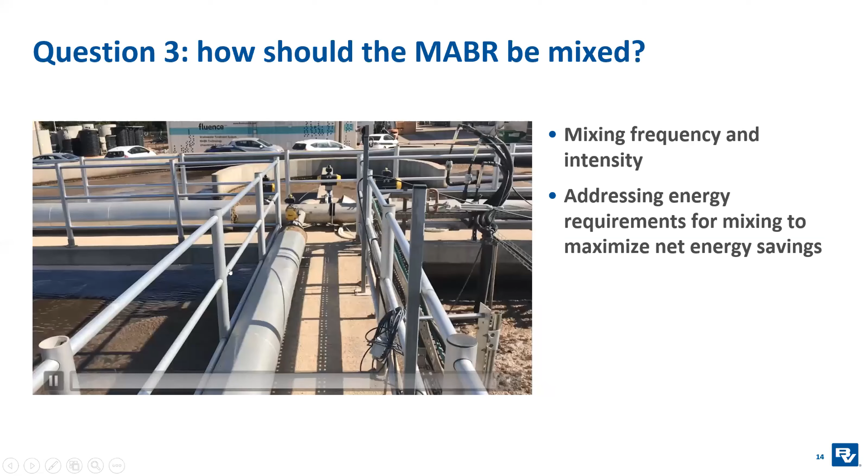So it's not a large amount of mixing energy, and it's really just a control issue - how do you control that airflow to actually mix the system?

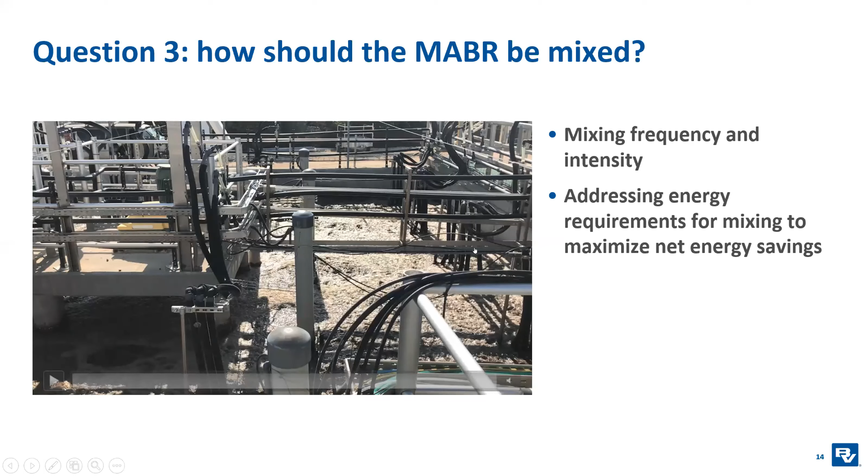There are other ways to mix MABRs. Each manufacturer has their own unique take on it. I think the Fluence whole package approach, where it's really tied to the overall aeration system, is a pretty unique aspect that is maybe more applicable to small to medium-sized facilities, but is a nice way to maybe not need an extra blower to handle your mixing.

The fourth question we're pretty interested in is what are the headworks requirements? I saw some of those questions coming through before. The current applications are really focusing on what I call ultra-fine screening - maybe not ultra, but this 1 to 2 millimeter screen. You're not seeing clogging or accumulation issues with this type of screening on the influent.

But this is a big question, and other research projects are looking at this with MABR technology to say, well, what if we had a 3 millimeter screen? Or what about a 6 millimeter screen? Do we get a lot of hair? Do we get a lot of material accumulating in the MABR over time? If you get that clogging, it's just going to reduce your effective surface area.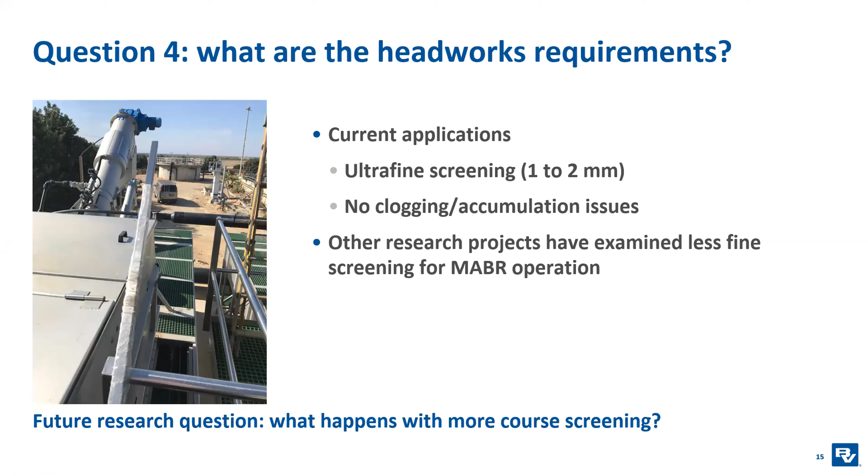There's a lot of really good work showing that, yeah, if you have really good influent screening, you don't have these detrimental clogging impacts on the MABR. But the next step of research is to say, well, what if you don't have as good of screening? How does this impact the MABR?

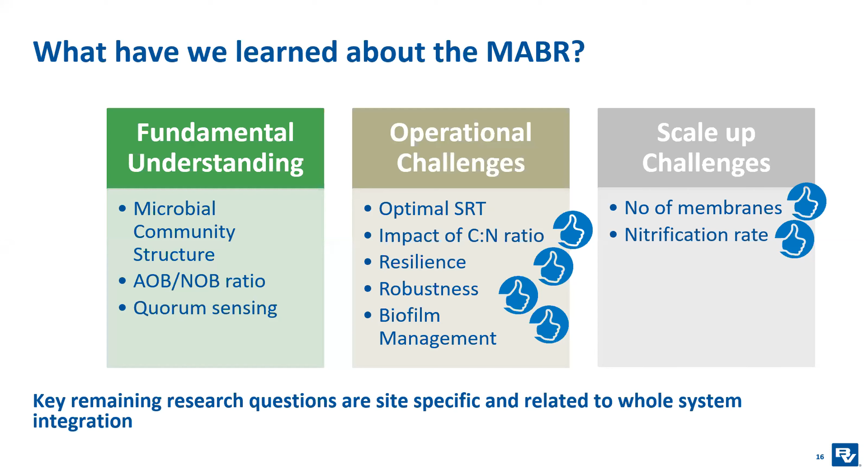So what have we learned? I think there's been a lot of really good learning around the design parameters you can look at - how the C to N ratio impacts the nitrification rate, how you mix the MABR to manage biofilm thickness, and maybe how you integrate an MABR into an overall activated sludge control system. There are always going to be research questions around site-specific applications and whole system integration. There's a lot of piloting being conducted globally to answer some of these site-specific questions, but the technology has gotten to the point where we can at least say, yeah, we should be in this range for design. Here are the kind of capital numbers, and we can do our cost-benefit analysis on the technology.

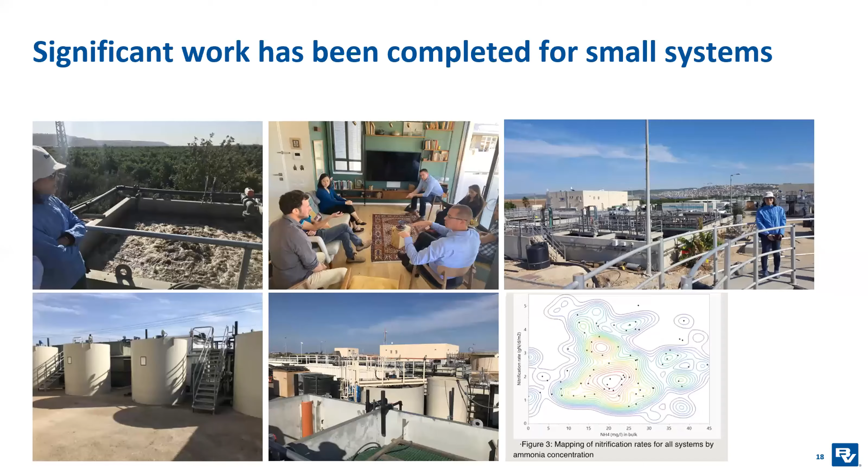So I've already used my extra 5 minutes, but there was one other slide that I wanted to focus on. Ronen spent a lot of time on Aspiral, so I'm going to page through these ones, but there's been a couple of questions on footprint. I thought this would be one slide I wanted to spend a minute on.

So why do we get a smaller footprint? One, we combine the functionality of aerobic and anoxic zones into one, and that helps reduce the overall footprint of the facility. The second aspect is we can actually operate at a slightly lower bulk liquid SRT and just reduce our safety factor a bit.

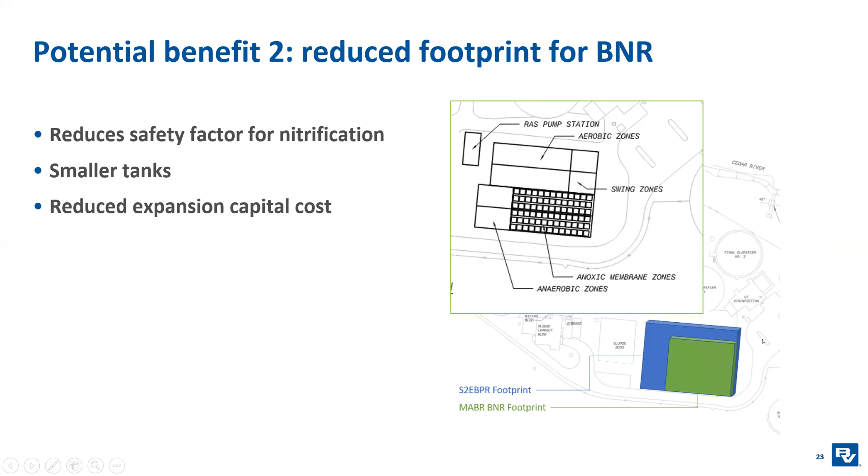But instead of carrying a safety factor in our bulk liquid, we're shifting that and saying, well, we've got all this extra biomass in our biofilm, and that's where our safety factor occurs. So there is a pretty significant footprint savings you can have with an MABR, especially if you're building brand new tanks where you can optimize that layout.

So what are we learning about the MABR? What is this demonstration testing helping to show us? We've seen development of a flexible technology to meet multiple drivers. Our key benefits are energy savings, compact BNR, really efficient total nitrogen removal. And if you have a phosphorus limit, this plays into the overall process configuration and complexity as well.

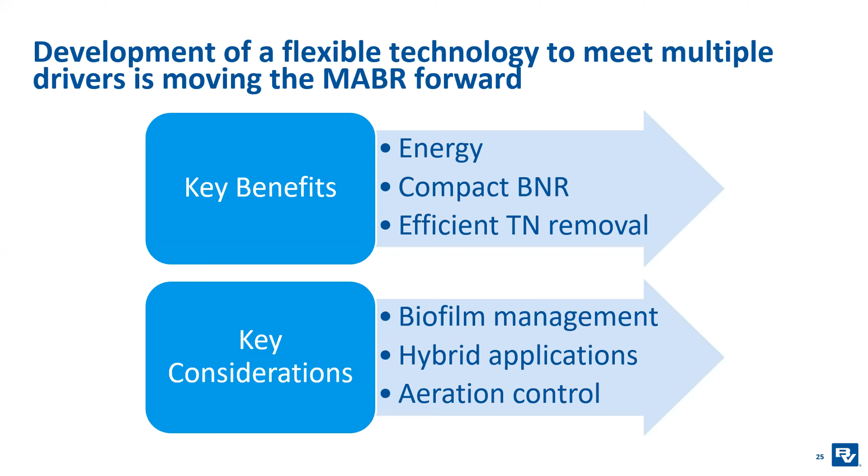So that's a high level overview. I appreciate the opportunity to share what we've been learning with Fluence.